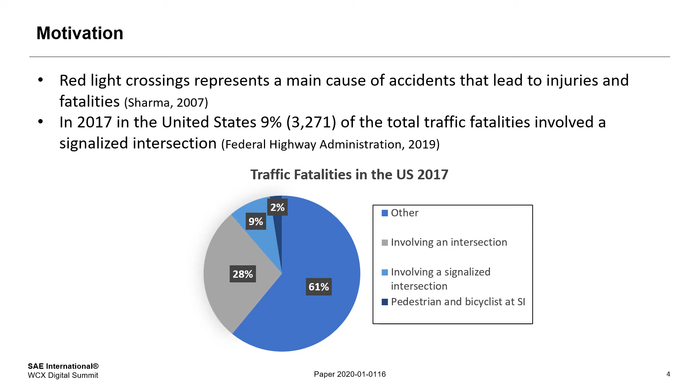Red light crossings is a significant cause of accidents. Just in 2017, 9% of the traffic fatalities had something to do with a signalized intersection in the United States. This is something that we would like to minimize as much as possible. Some manufacturers, like Audi, have started to implement technologies like green light optimized speed advisory or GLOSA in their vehicles, and we were wondering what effects would these technologies have on safety.

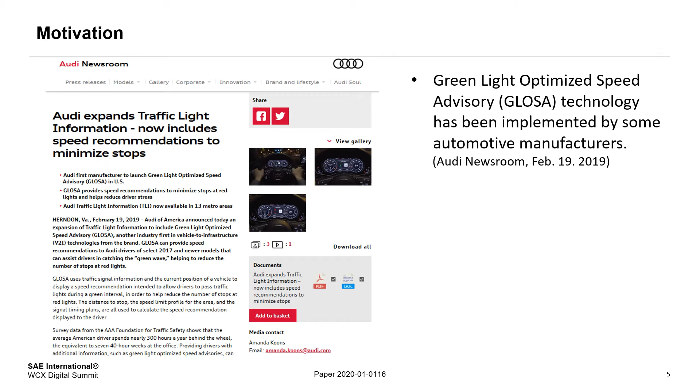So the way GLOSA usually works is that typically we will have a roadside unit or cellular device on the intersection that can interface with the controller, and we will have a vehicle that has an onboard unit or cellular device. This would allow for data transfer between the intersection and the vehicle, and information such as the intersection topology, the location, the current phase, and how long the phase is going to last can be transmitted from one side to the other.

After this is done, the vehicle can then process the data and calculate an optimal approaching speed so the vehicle can get to the traffic signal during the green phase of the cycle. There is room for improvement in the sense that few GLOSA studies have taken into consideration actuated traffic signals. Added to this, the negative effects of latencies can also be reduced. Now let's look at the literature review.

Parsonson and Zegeer were able to identify that rear-end collisions and right-angle crashes are a result of dilemma zone exposure. The dilemma zone is an area in which after an onset of yellow, motorists are not sure if they should continue or stop. This uncertainty increases the risk of an accident. We will look with more detail into this topic later on. Zimmerman was able to mitigate the incursion of vehicles in this zone by controlling signal phases and warning drivers of a possible risk.

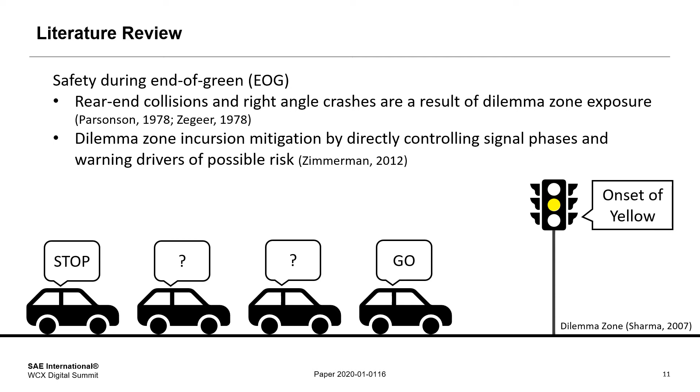Stahlmann found out that GLOSA simulation studies tend to overestimate transmission ranges and message delivery ratios, and it is also important to note that there are GLOSA systems that aim to improve specific aspects, like travel time or fuel consumption.

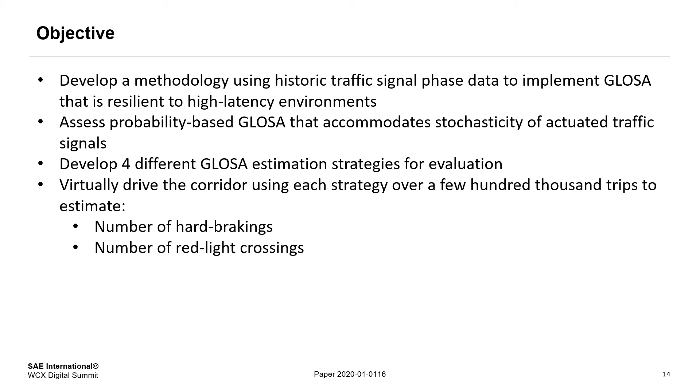The objectives of the study were to develop a GLOSA system that is resilient to high latency environments and that accommodates the stochasticity of actuated traffic signals, to develop four different GLOSA estimation strategies for evaluation, and to virtually drive a corridor using each strategy over a few 100,000 trips to estimate the number of hard braking events and the number of red light crossings.

The novelty of the study is that only a one-time download of historic data is required to provide advisory for the complete route, that the system presents capabilities for actuated traffic signals, and that we're focusing on the effects that the probability-based GLOSA has on safety. Now we can move on to the methodology.

The testing route in which the virtual drives were carried out is a segment of US 231 located in West Lafayette, Indiana, that goes from US 52 to South River Road. You can see in the map all the intersections that are in this segment of the road. And we had two timing plans, one that goes from 8:15 a.m. to 9 a.m. and another one that goes from 9:15 a.m. to 2:45 p.m.

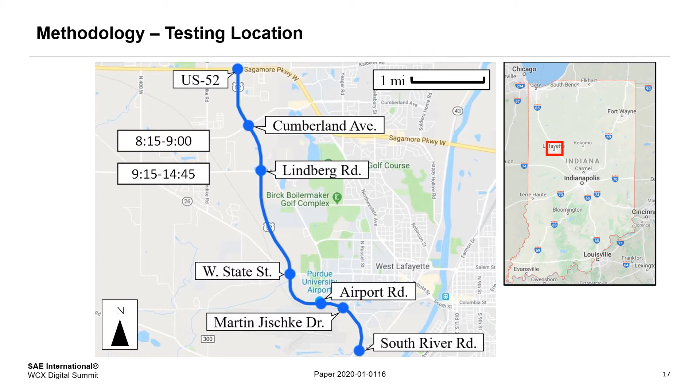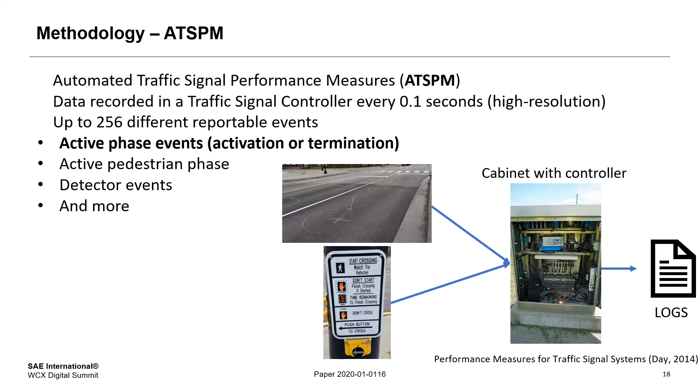To develop the probability-based GLOSA, we needed to access the historic intersection phase events data. So we utilized high-resolution traffic signal controller data, which saves events in log files with a tenth of a second resolution. This way we could know what phases were on at a specific traffic signal at a specific time of day, and we could then calculate probabilities.

For example, if we wanted to travel on Tuesday 19th of March 2019 between 8:15 a.m. and 9 a.m., then we will be looking at a previous week's information with the same time of day, so between 8:15 a.m. and 9 a.m., and the same day of week timing plan. So if we were traveling on a Tuesday, that means we will be looking at events that occurred between Monday and Thursday. This is because the traffic signals have similar timing plans for these days.

Now we're looking at one of the first traffic signal cycles in the current time of day plan when going northbound on Martin Jischke Drive on the Monday before our intended trip. If we focus on a specific time inside the cycle, we can see how different events occur throughout the time of day period. We can see how for the time in cycle 70, one of the first events is a red light. But as we move forward, we start to see different events.

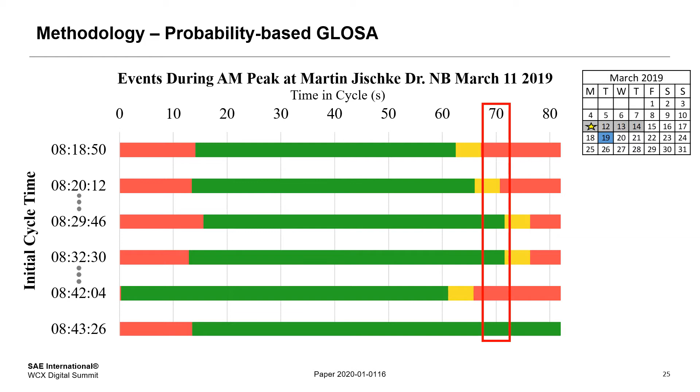At the end, to calculate the probability of the traffic signal to be green at a specific timing cycle, we count how many green events occurred for the entire day of week plan for the same time of day period and divide this number by the total number of cycles that were analyzed. By just looking at a few cycles on Monday 11th, we could predict that the probability of the traffic signal to be green at a time in cycle 70 will be close to 50%.

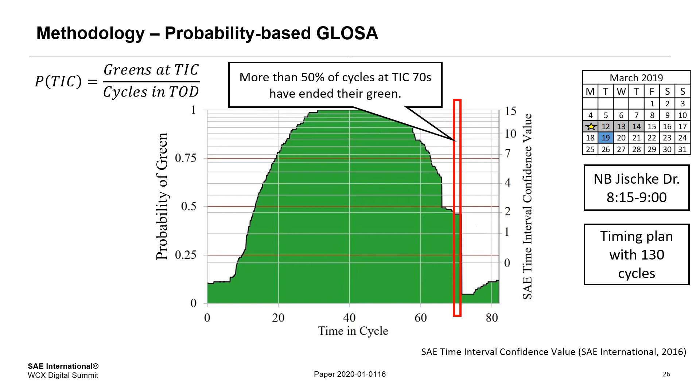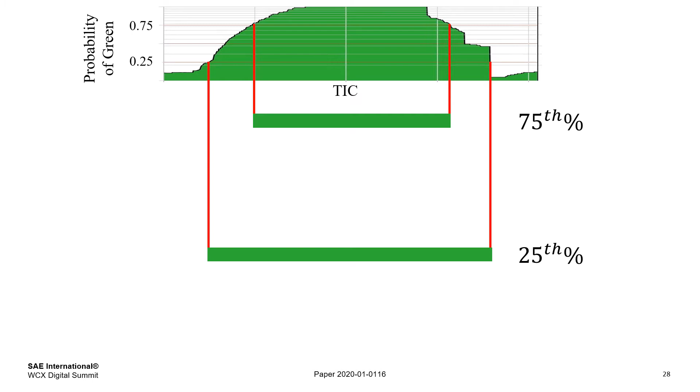Nevertheless, we have to translate the obtained probability profile to a binary advisory. To do so, we make use of thresholds that will make our probability either a green or no green prediction. With a 75th percentile threshold, the predicted green time will look like this. Whereas, with a 25th percentile threshold, the predicted green time will look like this. The different lengths of the expected green time will have different consequences on the advisory outcome.

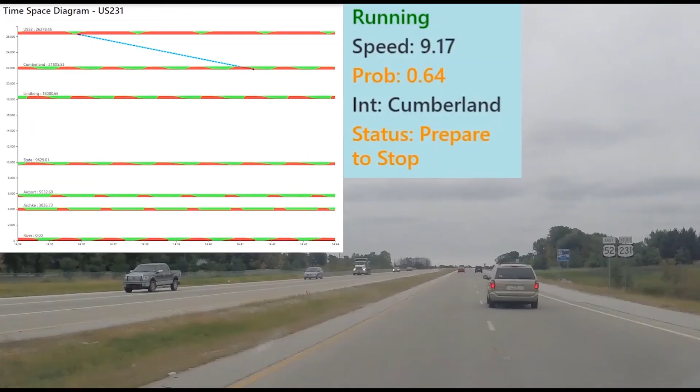This is a short video that shows how the traffic signal phase prediction works. In this case, we are utilizing a 70th percentile threshold to calculate the probabilities. We can see the vehicle's current speed and the current probability of arrival on green. The instant projected trajectory is also shown.

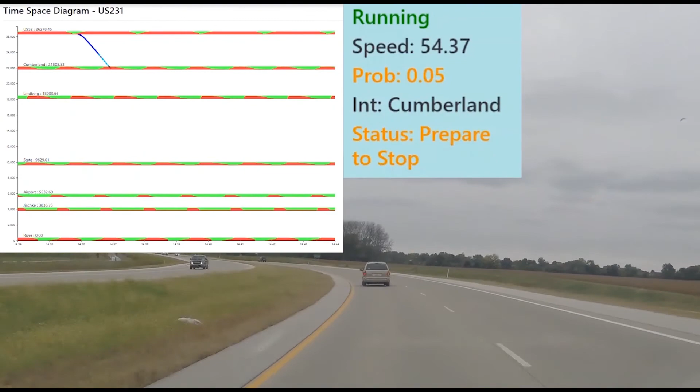For example, now we see a probability of arrival on green close to 0%, so we would expect to arrive on red or yellow. Now, the probability of arrival on green is close to 100%, so we would expect an arrival on green.

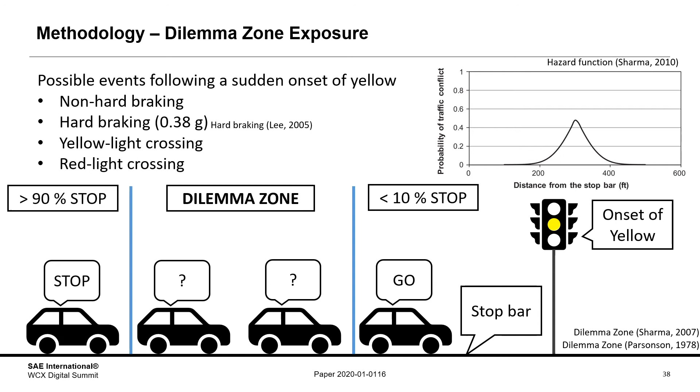We can calculate a vehicle's probability of stopping based on its speed and distance to the stop bar by utilizing a binary logistic regression function that has been designed for light vehicles. If we focus on the most critical point, when 50% of the vehicles would stop, we can obtain a function that provides information on what speed a vehicle needs to be traveling at a certain distance from the stop bar to be located at this critical point.

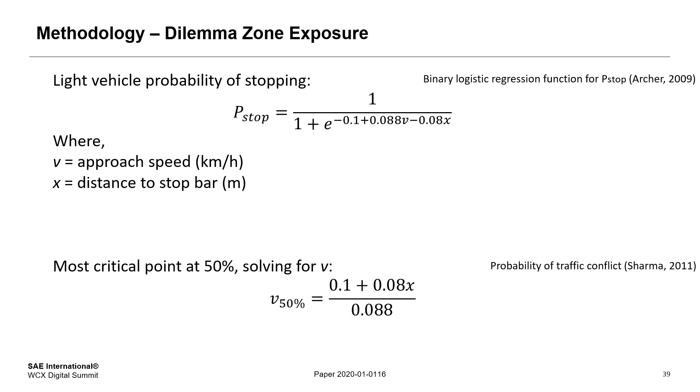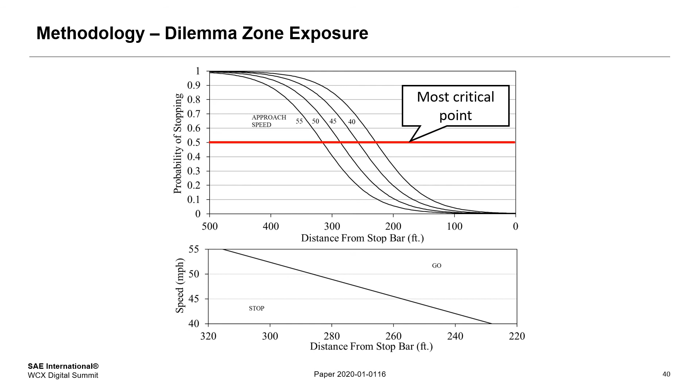Here, we can see the probability of a vehicle to stop depending on their speed and how far away they are from the stop bar. The graph at the bottom shows at what speed a vehicle at a given distance will have a 50% probability of stopping. Vehicles going faster than this speed will be more likely to decide to cross the intersection, whereas vehicles going slower will be more likely to decide to stop.

Regarding the virtual drives, 486,000 trips were driven, phase events were taken from each signal controller's historic data, different GLOSA strategies were tested for each drive, including unadvised, aggressive advisory, balanced advisory, and conservative advisory, and the simulation period was from March 18th to March 21st, 2019. This means that the probabilities were calculated from March 11th to March 14th, 2019.

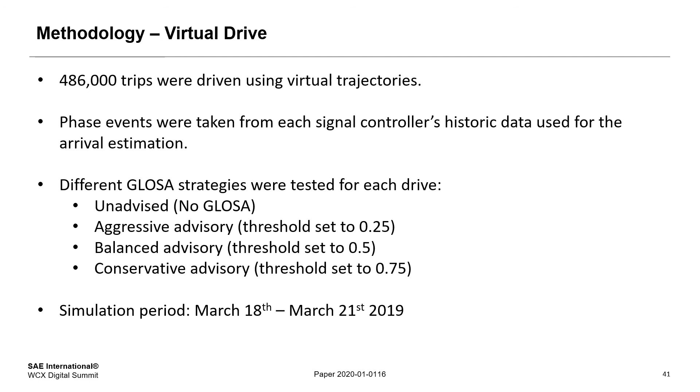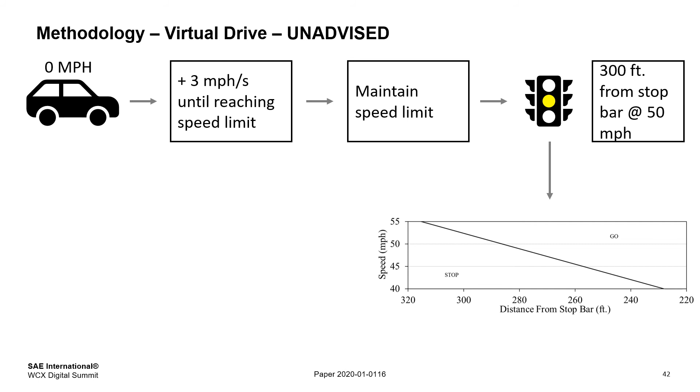The way unadvised trajectories were carried out was with the vehicle starting at a stop condition at the beginning of the route. Then, the vehicle started accelerating at a 3 miles per hour per second rate until reaching the speed limit. At this point, the vehicle simply maintains this speed until a yellow light or a red light are seen. If, for example, the vehicle saw an unexpected onset of yellow 300 feet away from the stop bar while traveling at 50 miles per hour, the speed and distance would then be compared to the critical speed function. If the speed at the specified distance is lower than the critical speed, then the vehicle stops in the virtual drive.

Nevertheless, if we plotted this point in the binary regression function, we would obtain the real probability of this vehicle to stop. For this reason, the vehicle's speed and distance to the stop bar when the onset of yellow occurred are saved. At the end, post-processing calculations were done with the entire analysis data to obtain how many vehicles decided to stop and under which circumstances.

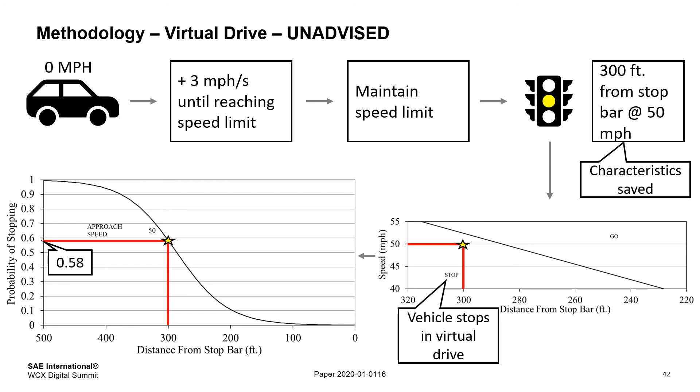The way advised trajectories were carried out is similar to the unadvised trajectories. First, the vehicle starts at a stop condition at the beginning of the route. Then, the vehicle starts accelerating at a 3 miles per hour per second rate until reaching the speed limit. At this point, we start using GLOSA. If green is not predicted to be possibly reached, then the driver is advised to prepare to stop. If green is predicted to be possibly reached, then the vehicle modifies its speed at a 1 mile per hour per second rate within a permitted speed range that goes from the speed limit to a specified minimum speed.

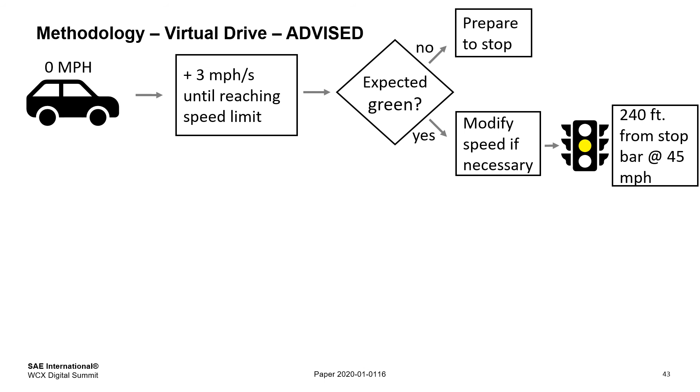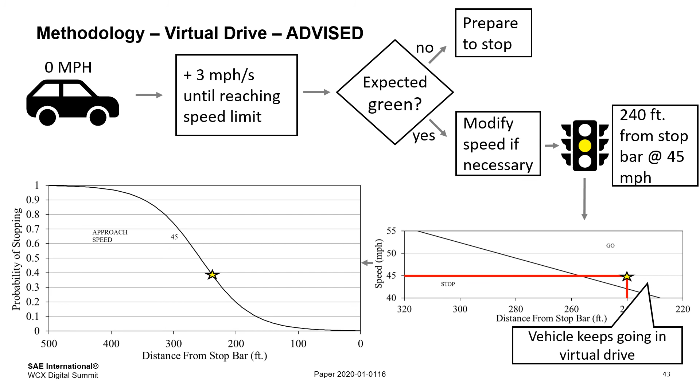If, while predicting an arrival on green, the vehicle saw an unexpected onset of yellow 240 feet away from the stop bar while traveling at 45 miles per hour, the speed and distance would then be compared to the critical speed function. If the speed at the specified distance is faster than the critical speed, then the vehicle keeps going in the virtual drive. Nevertheless, if we plotted this point in the binary regression function, we would obtain the real probability of this vehicle to stop, or in this case, to keep going. Finally, we save the vehicle's speed and distance to the stop bar when the unexpected onset of yellow occurred for post-processing purposes.

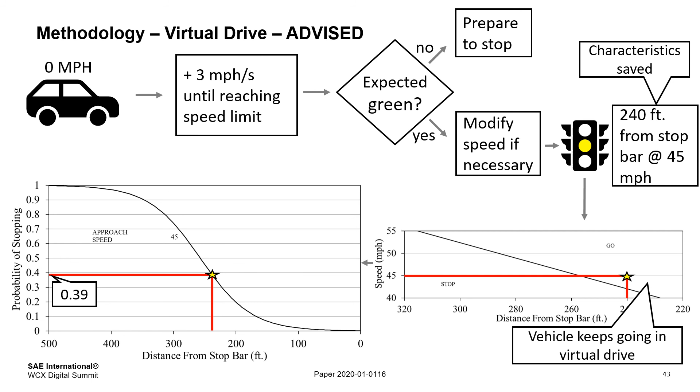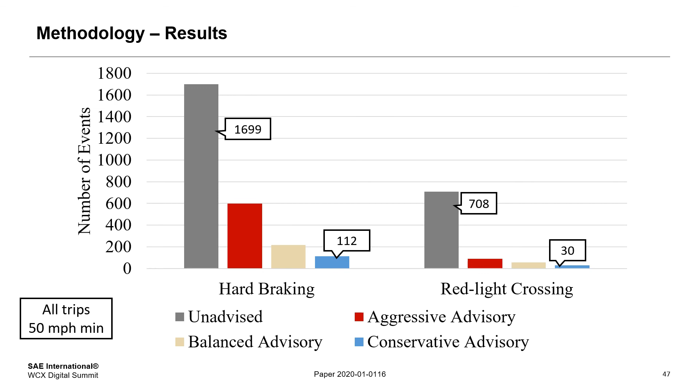In conclusion, the proposed probability-based GLOSA system showed that it would improve safety during the end of green, since reductions of 96% of red light crossings and 93% of hard braking events were accomplished. Travel time only increased by 24 seconds in the worst case. The future work consists of incorporating fuel consumption models and performing field tests.